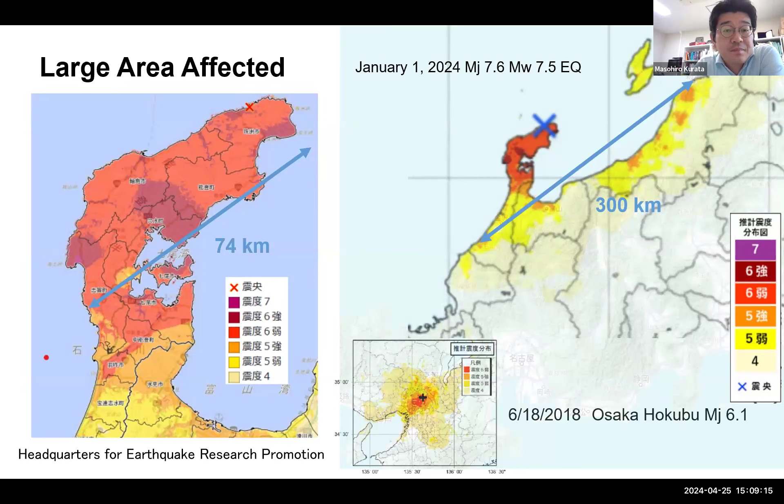So these are the characteristics of the event. As of April 23rd, casualties were 245, housing damage 78,000 units. Non-residential building damage is 23,000. Strong shaking with JMA intensity of 7 was recorded in Wajima, on the top-left side of the Noto Peninsula, and in Shika town.

And the crustal deformation was very significant. Actually, in the Wajima area, the port facility was uplifted by 4 meters, so now there's no water in the port.

This region was known for earthquake swarms. The most recent notable one was in 2007 with magnitude 6.9, and also last year in May they had a magnitude 6.5 earthquake. This time the earthquake warning system worked correctly. In some regions it didn't reach on time, but after about 10 to 20 seconds the earthquake warning was triggered, which helped people prepare for the strong shaking.

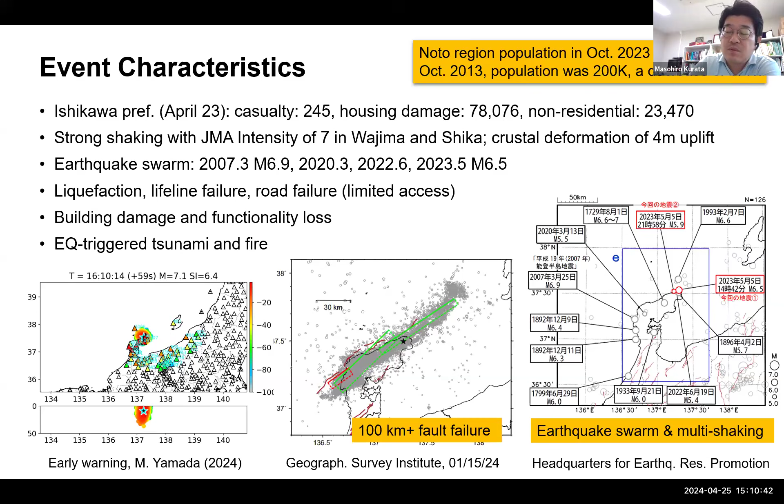A little bit about seismic damage and seismic design in Japan. The new building law was enforced in 1981. From that time, buildings are designed for two levels. Level 1 is for serviceability, for a return period of approximately 50 years. Level 2 is the safety limit for a very rare earthquake with a return period of approximately 500 years.

After the Kobe earthquake, the government and researchers noticed that buildings built after 1981 had a lower collapse ratio and damage ratio, so they enacted laws for the promotion of seismic retrofit. Now hospitals, shops, hotels, schools, and elderly care homes—many of them are seismically upgraded.

And also, even for private buildings, if the building is along a regional disaster response bases or evacuation route, they need to be diagnosed and then recommended for seismic retrofit. More recently, in 2018, after the 2016 Kumamoto earthquake, a new guideline on functional continuity for disaster response space was issued. Now government offices, hospitals, shelters, and schools need to consider functional continuity.

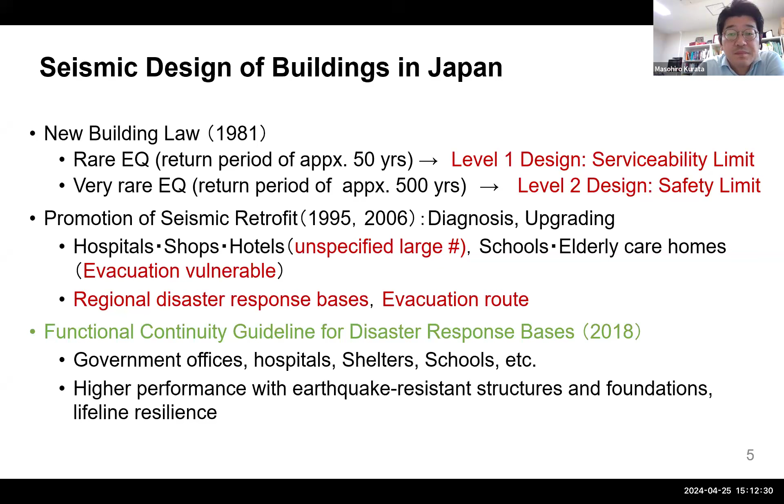This is the recorded ground motion. I believe Professor Goto explained the ground motions last time in the briefing, but in this acceleration spectrum, I compare the recorded motion with the level 2 design strength for buildings.

It's about 1G. So on the north side, or northwest side, of the Noto Peninsula, at most places the ground motion exceeded the design level. And even in the lower part of the peninsula, the ground motion exceeded the level 1 design. So severe building damage was expected.

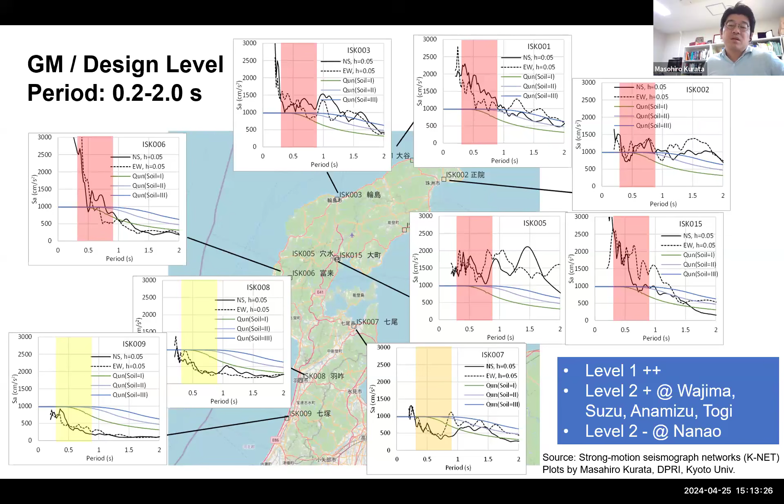A little bit more analysis on the ground motions. These are the figures for the pseudo-acceleration and spectral displacement relationship. For a stiff building with a natural period of 0.2 to 0.3 seconds, the deformation was perhaps not so large.

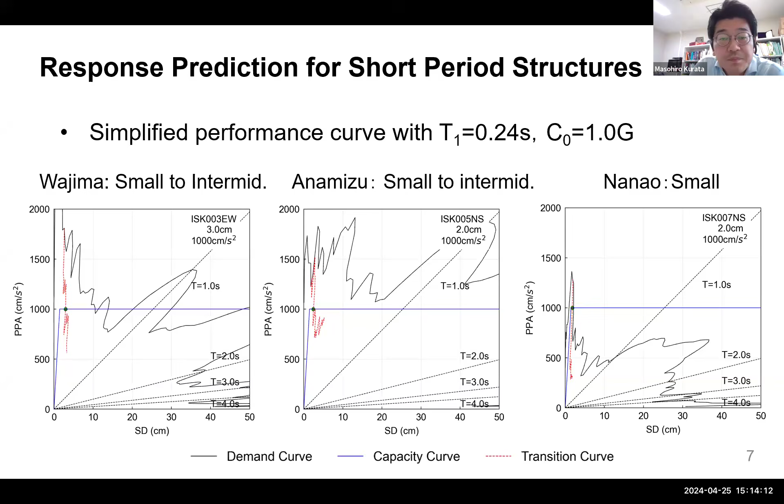While we have a pulse-type motion with power in the period range of 1 to 2 seconds in this spectrum, so if we consider a building with a little bit longer natural period, let's say 0.7 seconds—in Japan steel buildings have a base shear coefficient of 0.3 to 0.45.

So if we set the base shear coefficient to 0.45, the capacity spectra method provides us the large deformations expected for steel buildings or timber buildings with a relatively longer period at some locations.

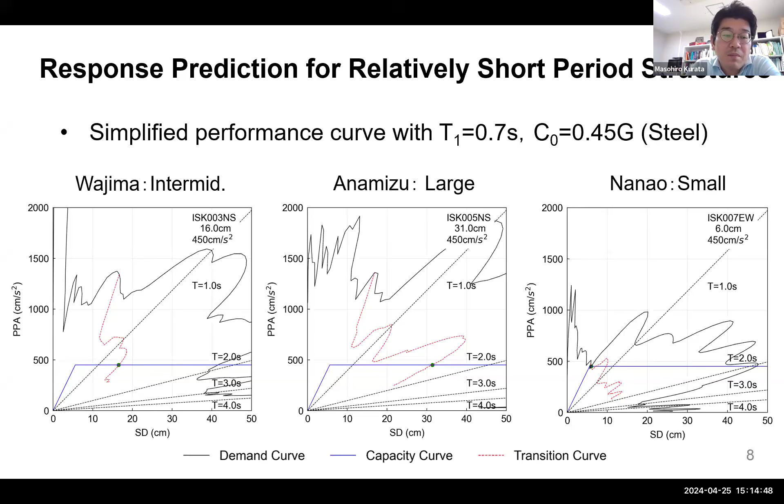We conducted a reconnaissance survey in the area around the ground motion stations. I will focus on the non-residential or non-wood structures, ground deformation around the structures, and the functionality of the disaster response bases or other large buildings.

The survey team's trip departure was approximately 2 weeks after the earthquake with DPRI colleagues, and later with colleagues from Nagoya or Tokyo University we conducted a more detailed survey of the buildings.

At the same time, we hosted Professor Khalid Mosalam of UC Berkeley from November to January. So we had the opportunity to talk about the STEER program for a virtual reconnaissance report, and now we collaborate on their report.

The survey was powered by the Fulcrum STEER application provided by Professor Mosalam's team. So I recorded the photos and then the damage rate using their application.

For example, this is the Wajima City records. WJ01, in the very right, the green one, is the strong ground motion station. From there I walked a little bit for about 2 hours and then recorded the damage of the buildings. The red indicates destruction, mostly residential. There are a few non-residential buildings because this is a kind of suburb in Japan.

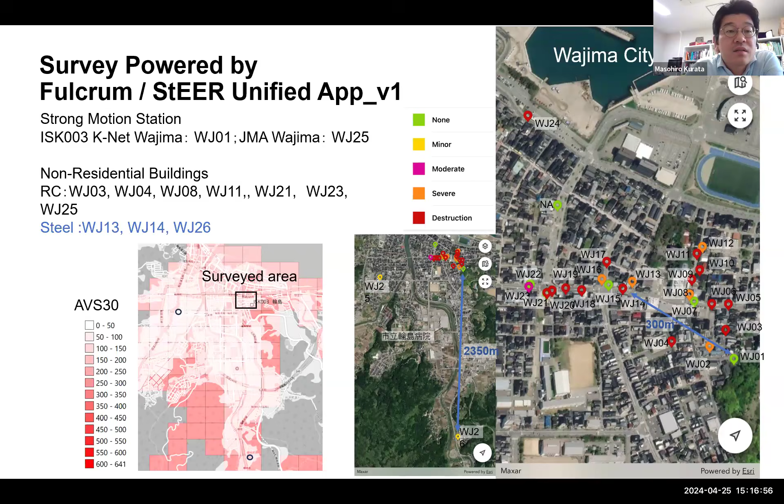I'm originally from the steel structure expertise. However, I only found about 3 steel buildings damaged at this site. This is the scenery of the town, drastically changed by the earthquake.

You see, due to the liquefaction of the reclaimed soils, the lifeline systems uplifted. And then we see a lot of complete collapse of traditional housing in these regions. At that time the temperature was very low, around 1 to 2 degrees, and we had a snow warning.

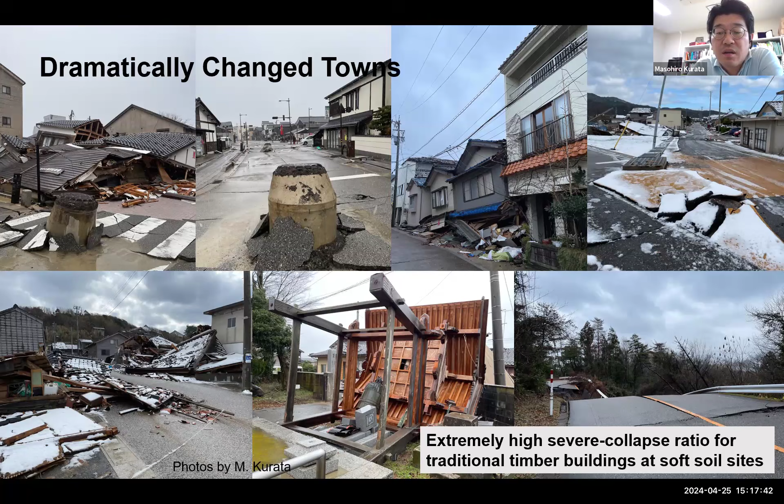Also, a lot of historical structures, including temples and shrines, were severely damaged. This is a photo of a typical traditional timber house in Japan.

It's a moment resisting frame with walls as the shear resistant element. And normally the strength is calculated by the area of the wall.

On top of the roof we have the so-called kawara, which is tile. With strong accelerations they displaced or slipped off.

Those timber houses typically have a semi-rigid joint at the connections. More recent ones have steel anchors, steel holder anchors, and connection elements. But the traditional ones typically have very low stiffness after some deformation.

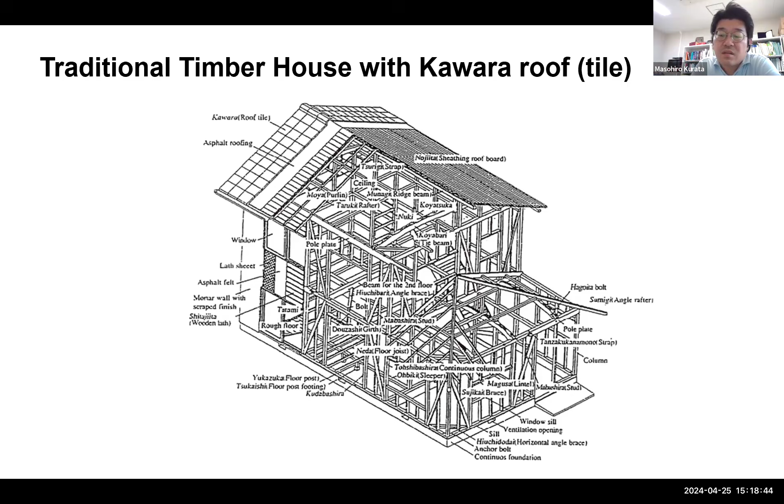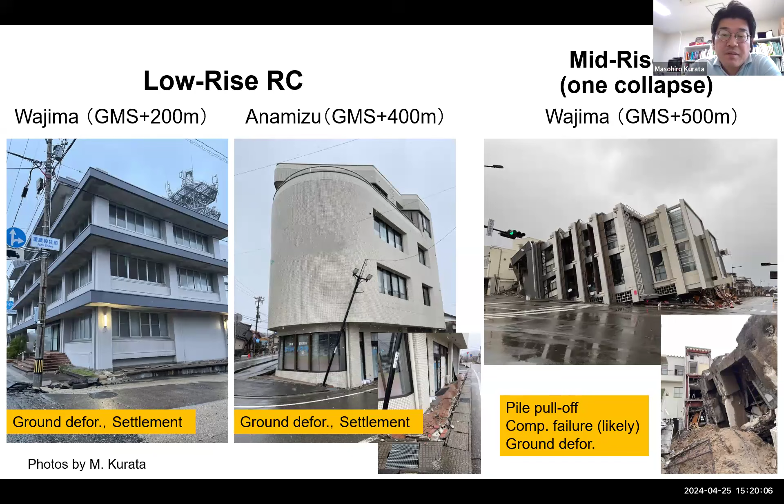But now the investigation is ongoing, like why these piles were pulled off. Before the year 2000 the design for the pile was not seismic, and after 2000 seismic design is enforced. So there are some technical problems for the old buildings in Japan, and it's difficult to retrofit.

For the steel buildings, they are mostly low rises. They are subject to severe ground shaking, and there may be amplification due to the relatively softer, relatively longer period of the structure.

And they suffered from cladding damage, very severe. Some of them collapsed, but they are aged and have very small sections of the column, so they are seismically deficient.

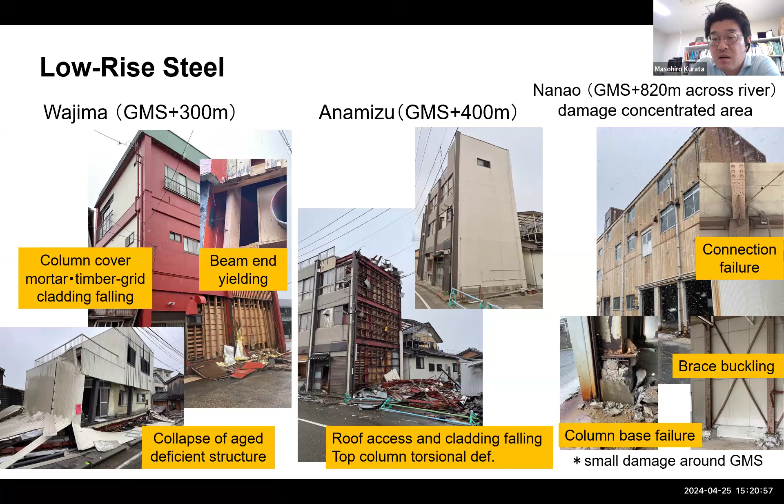We saw also buckling of braces, column base failure, but in the right figure this column base is an old type, so it is not conforming to the new design specifications.

Some statistics: in Wajima and Suzu cities, the severely affected areas have an aging rate of 65 plus for about 50%, which is very high. Even Japan is known as a world-leading aging country with a 28% aging rate, but these regions have a really high aging rate.

Also, vacant houses are an issue, around 20% in this area compared to 13% in all of Japan. The building damage rate issued by the Wajima and Suzu City Council on February 4th says destructive failure was around 35%, which is very, very large, but those are mostly the traditional timber housing.

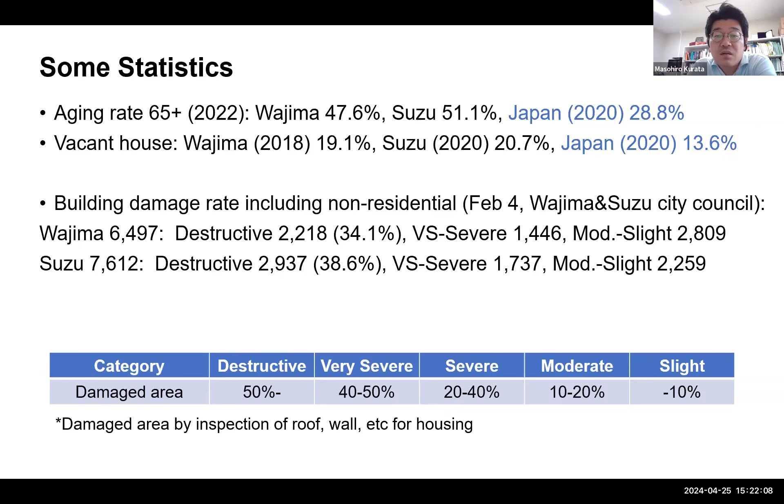If we go to the site, we see a lot of new housing designed and built according to the new specifications. They survive without much damage.

A little bit about the schools. Seismic upgrading was enforced after the Kobe earthquake in 1995. In Ishikawa Prefecture, around 100% earthquake resistant rate was achieved. However, about 85% of public schools in Ishikawa Prefecture were damaged somehow. The damage varies from a single broken glass to structural members or equipment.

Damage to upgraded school buildings is small, but if we see the left figure with steel braces, the building was okay, but with some ignorance in the construction, shear failure of a short column occurred. This is minor, so the building can still be used from a structural aspect.

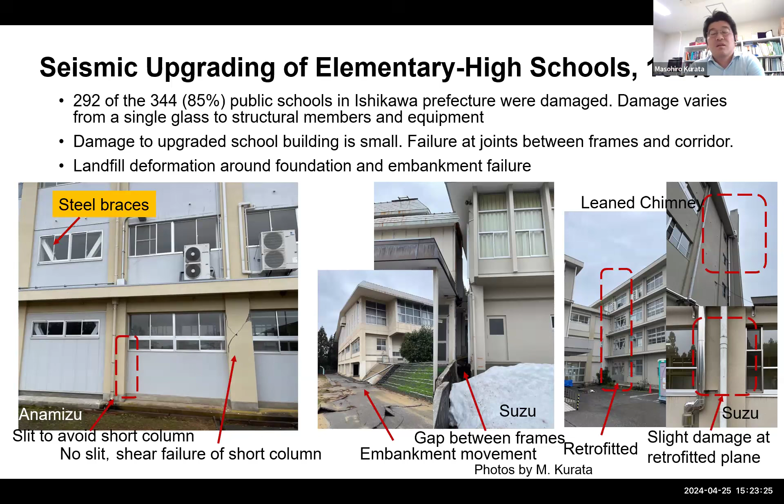The building was mostly fine. However, there's a gap between the frames because of maybe slip or the failure of the embankment, or leaned chimneys, and those non-structural damages were notable.

Talking about non-structurals, these are photos of steel school buildings, but the cladding falling at the higher floors was severe. Likely this is because of the accelerations, not the story drift, as the damage was severe at higher locations. We also see some collision between the ceiling and the claddings, and some contents of the buildings jumped out from the windows over the damaged cladding area.

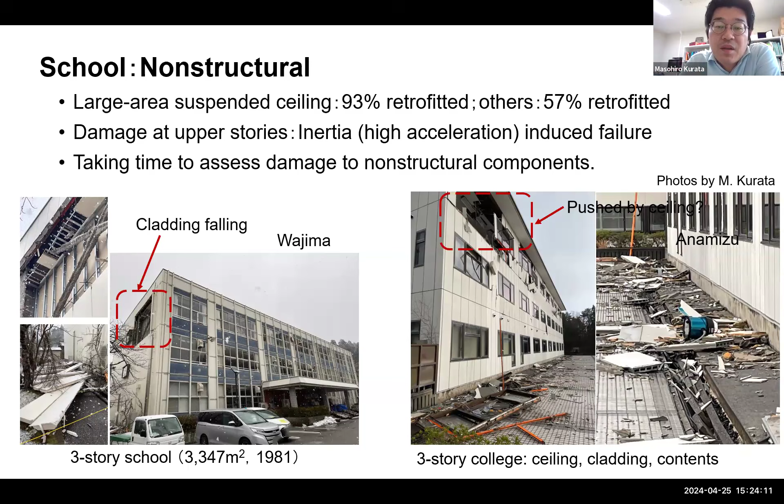Liquefaction was very, very significant. Even when the building was okay, due to this liquefaction, functionality was completely lost.

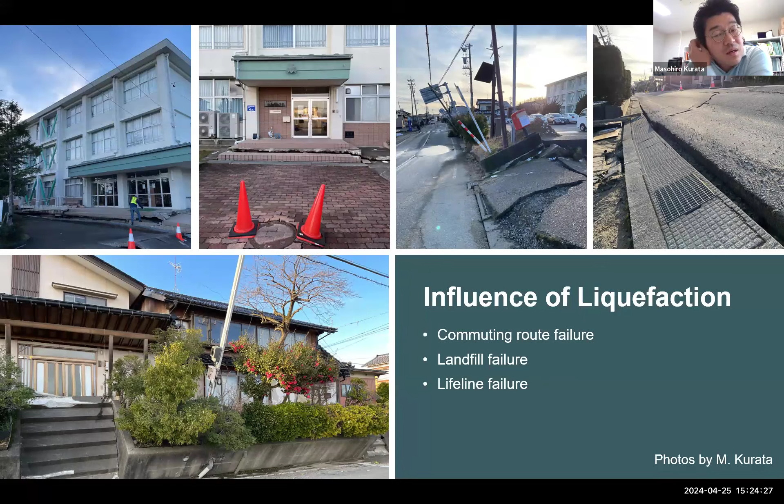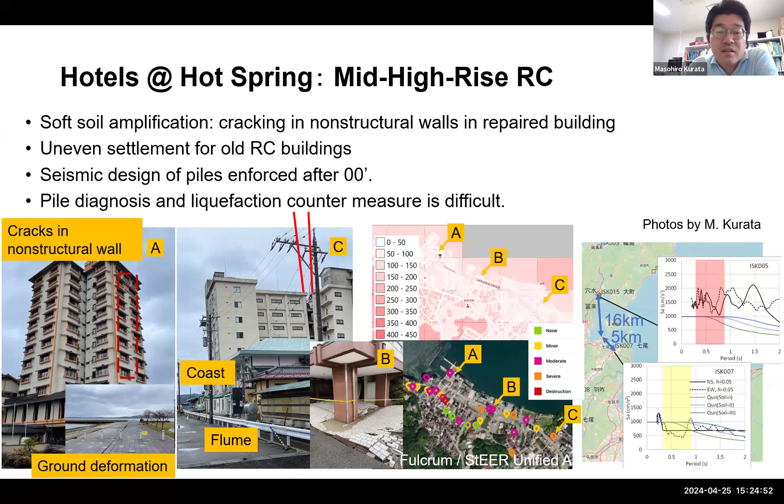Whereas one area of exception, nearby Nanao area, there's a hot spring area. So they are rich, they have a lot of taller buildings with more than 10 stories. Some of them had shear failure in non-structural walls or leaning, again due to soft soil problems.

Steel, there are structural hotels there. They typically suffer damage to the cladding. And if we see closely the steel members after the failure of cladding or a cover of the mortar connections, columns are severely corroded due to this near coast environment.

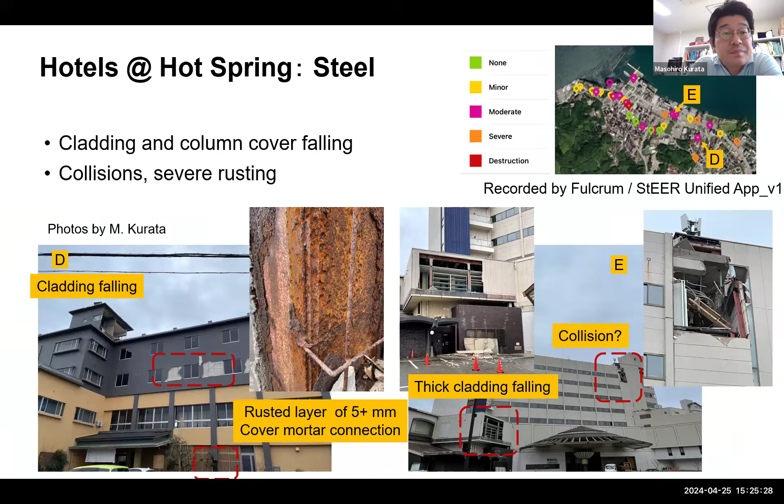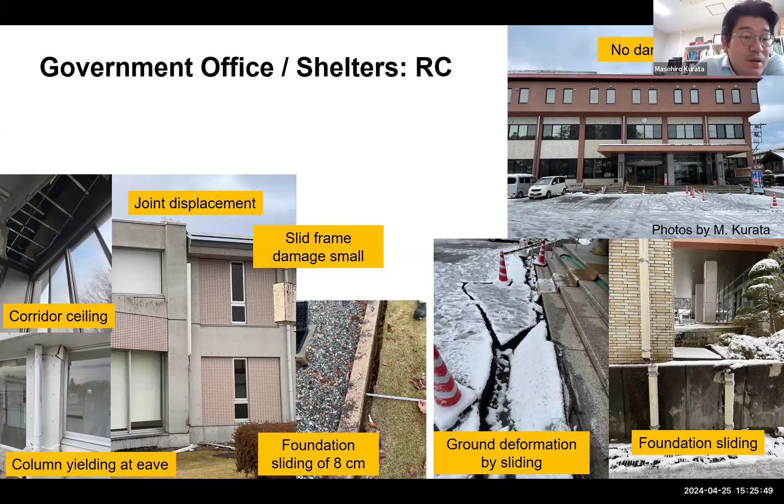Government office shelters were mostly okay, but again, there's ground deformation around the building that was very significant, likely due to strong shaking, of course, and also the softness of the reclaimed land. We also see ceiling failure at some locations.

This is a gymnasium of a government-owned building. Some members fell from, let's say, the light panel material. These light panel materials became popular after the 2011 Tohoku earthquake. They should be safe even if dropped, but however, the wire mesh to hold the panel also dropped together, and they are not so light.

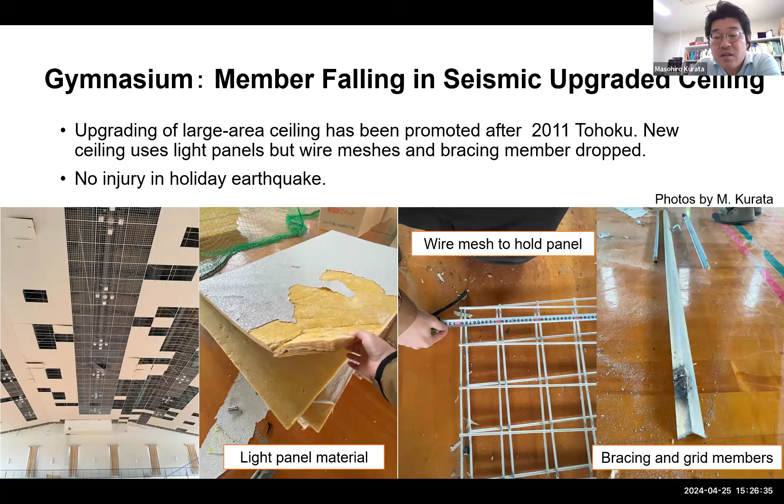And also the bracing and the grid member for the seismic resistance, they also failed at some locations. So those are some problems, maybe recent problems.

About the medical facilities, the major damage in Noto Peninsula, most of the buildings lost functionality due to the failure of water lifelines. Also power outages and partial damage to facilities and equipment. The earthquake resistance ratio for the disaster base hospitals in this area is 100%.

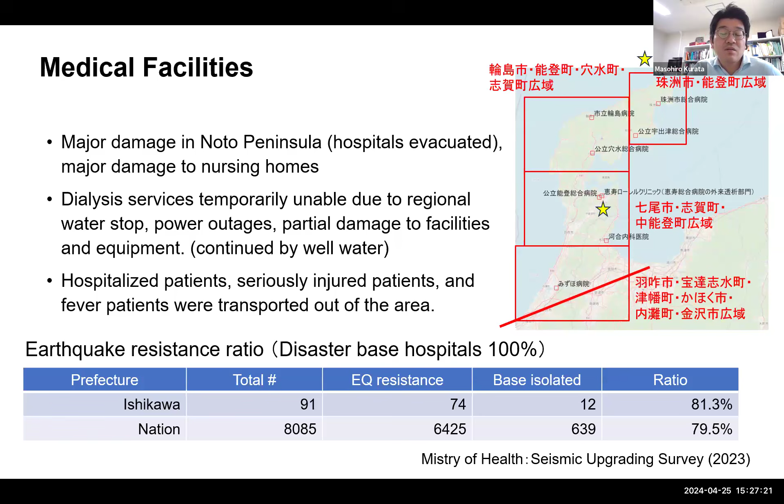However, they couldn't continue their business, and the hospitalized, seriously injured patients were transported out of the area using helicopters. These are some photos of the building damage at the hospitals: severe ground settlement, slope failure, and some non-structural components failure inside.

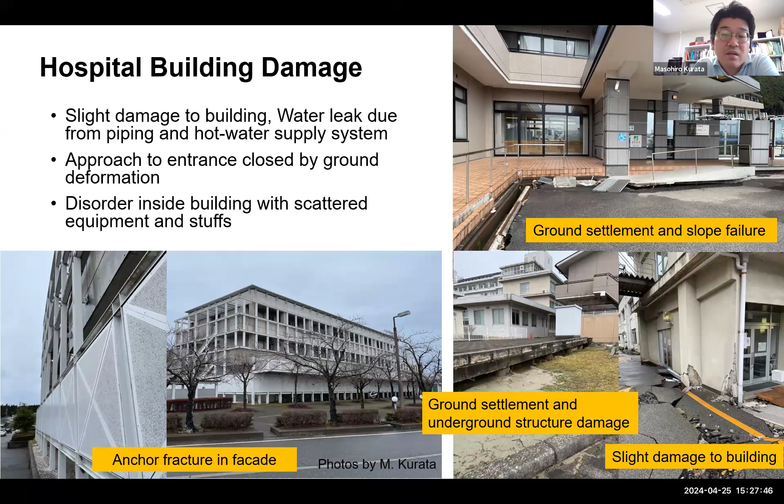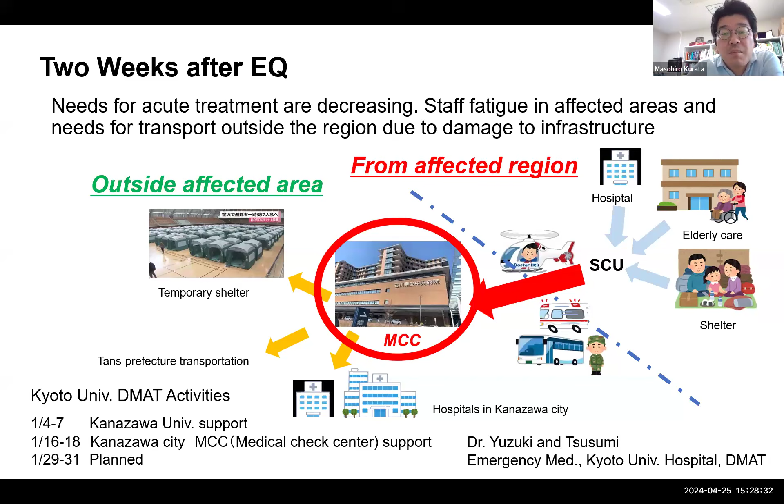In Japan, hospitals have BCPs (Business Continuity Plans). The BCPs were enforced in 2019, and for the disaster-based, large-scale hospitals, they are expected to have higher functionality after an earthquake or any disaster.

However, currently, according to the newspapers, the occupancy rate dropped to 20% due to staff shortage in some Wajima and Suzu City hospitals. The summaries showed reinforced concrete buildings with uneven settlement in areas with soft ground was notable. For steel buildings, non-structural failure with exterior walls, and then severe corrosion was a problem.

And for seismically isolated buildings, I didn't explain much, but there are several, and they worked properly. And for education and other facilities, earthquake-resistant buildings are effective.

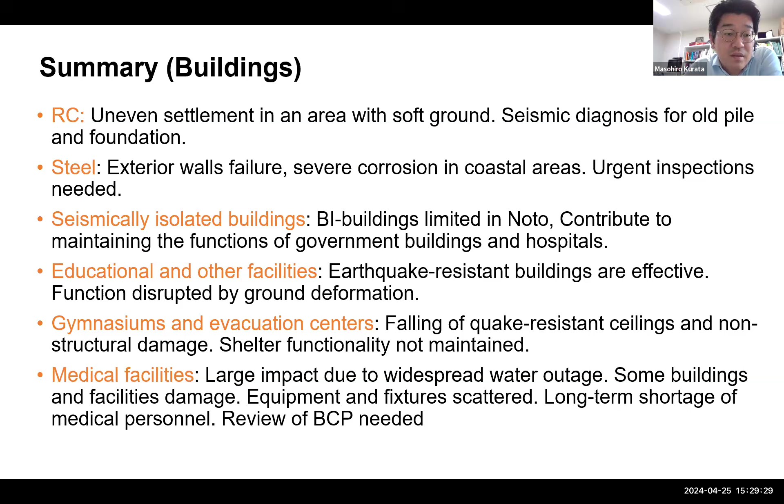Ongoing discussions for policymakers now start to discuss review of the regional factor, which was set before World War II. It was 0.9 for Ishikawa, 0.9 for Kumamoto for the strength reductions, but apparently they did not match with recent earthquake activities. Impact of foundation pile failure due to soft soils, or continuity of building usage, are some of the issues under discussion.

Also, the probabilistic hazard map in Japan, in the bottom left side, is severely governed by the Nankai Trough, the big mega earthquakes. However, in Ishikawa, the Kanazawa area in the bottom side has larger probability than the Noto Peninsula. However, in the Japan Sea coastline, there are offshore faults which triggered this earthquake. We have that information, but it is not affected, included, or reflected inside the probabilistic hazard map.

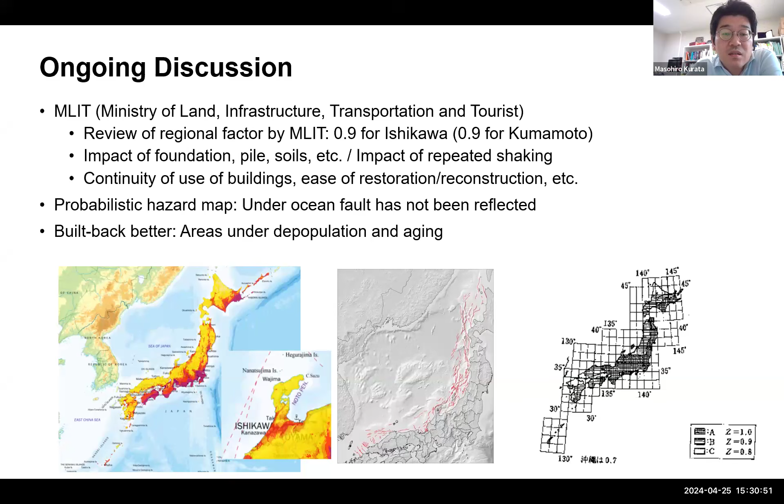They may need to be updated. And then other serious discussions on whether we do build back better, because these areas are under depopulation and aging. Thank you very much for your kind attention. This is my talk. Thank you.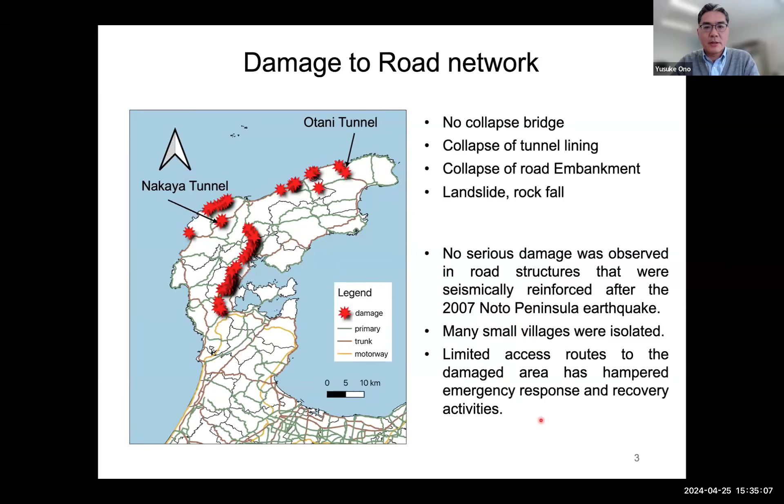So as I mentioned, there are many blocked roads. Many small villages were isolated, and this is a point that limited access routes to the damaged area hampered emergency response and recovery activities so much. This is the access route immediately after the main shock - the red line shows the road we could pass through. As I mentioned, many roads were blocked, and access routes to the northern Noto Peninsula were very limited. In particular, there was only one route from Nanao City to Anamizu town, which caused heavy traffic congestion.

Actually, when I visited Wajima City here, 10 days after the earthquake, I drove more than 7 hours from Kanazawa City. Kanazawa City is the nearest bigger city to Wajima City.

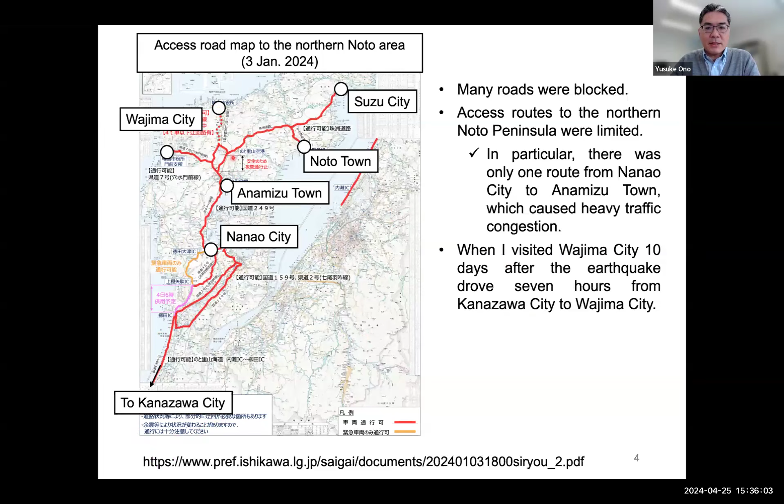These photos show the damage to road structures. This is a case of a collapse of a road embankment, and this shows the landslide which broke the transportation. And these photos show the damaged tunnels - the left side one is Otani tunnel, and the right side one is Nakaya tunnel. You can see the linings dropped off.

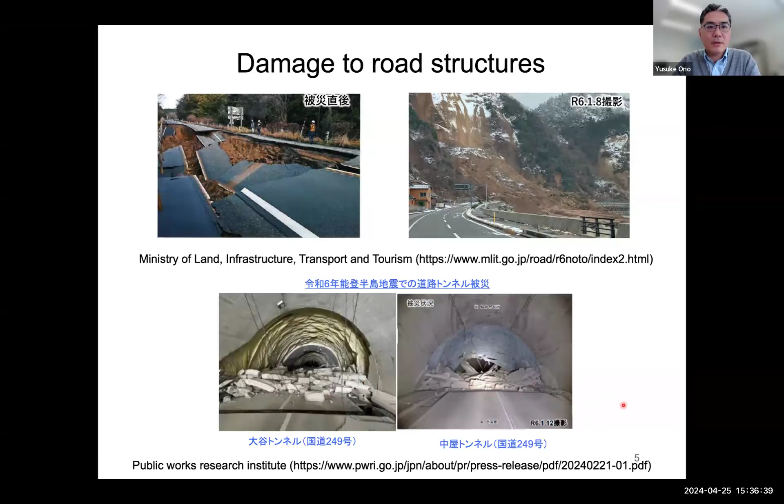Next, let's move on to the damage to water supply systems. Damage occurred in Ishikawa, Toyama, Gifu, and Niigata prefectures. Water disruptions were restored within a few days in all prefectures except Ishikawa. In the northern Noto Peninsula area, a large number of residents still do not have access to tap water, so restoration activities are still ongoing, and the full extent of the damage is not yet clear.

We can say that damage to earthquake-resistant pipes was limited to those involved in massive landslides and other large-scale ground movements.

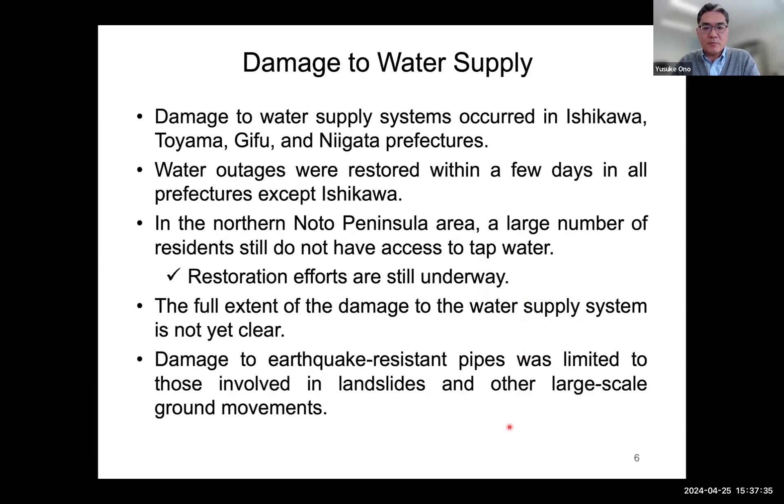This map shows the municipalities where water supply was disrupted. You can see the epicenter of the main shock is around here, so very wide areas were affected by this earthquake. In this figure, I put the names of municipalities which were heavily affected, and the figures below the names of the cities and towns show the number of households without water supply.

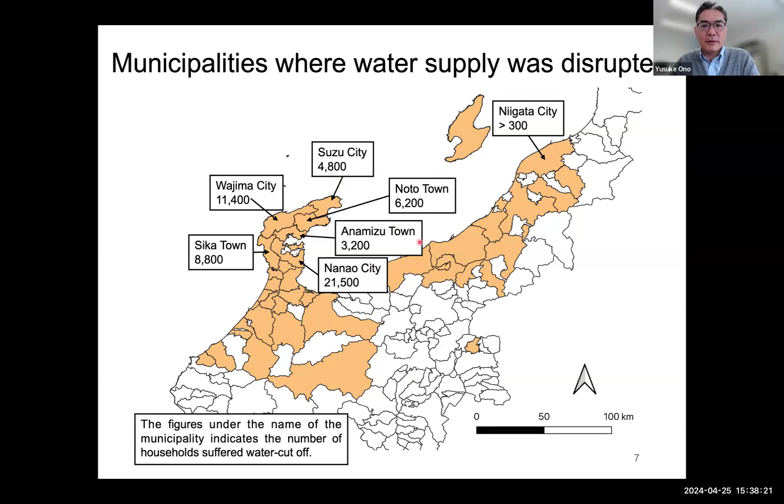This slide shows the restoration of water supply. The vertical axis indicates the days spent for restoration since the main shock. For Toyama Prefecture, it took 20 days, and for Niigata Prefecture, it took 6 or 7 days. Restoration works have not yet been completed in Ishikawa Prefecture, so I didn't include that data in this diagram. For Toyama, although it took almost 20 days overall, 90% of water outages were resolved within 9 days.

This map shows the location of these prefectures. Ishikawa is here, Toyama is here, this is Gifu, Nagano, and Niigata.

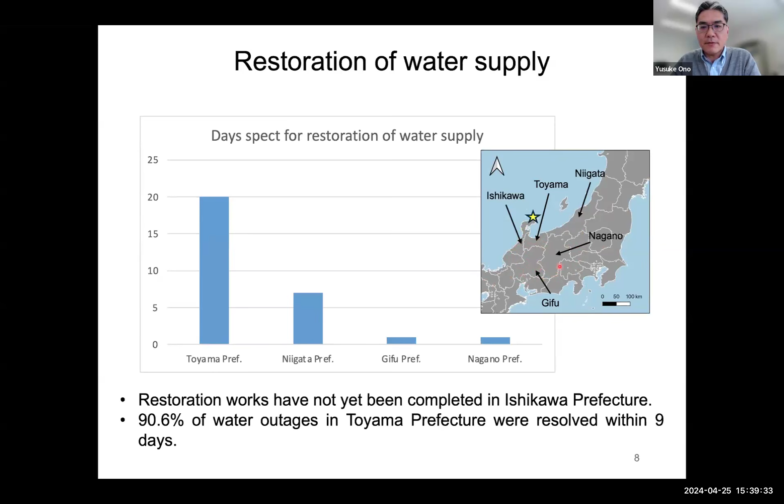This graph shows the restoration rate of water supply in the Noto area, particularly northern Noto. Here's Wajima City, Anamizu Town, Noto Town, and Suzu City. From Kanazawa City to Suzu City, the distance is about 100 kilometers, and the horizontal axis indicates the days since the main shock.

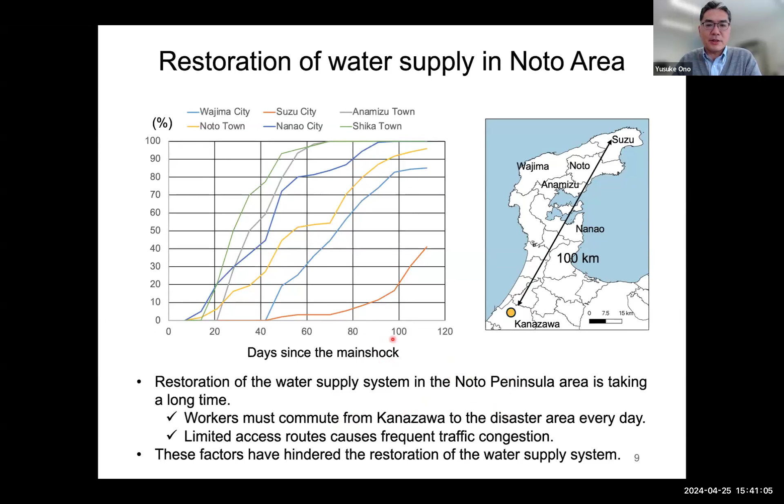Look at this diagram: the green one is Shika Town, and this is Anamizu Town, Nanao City, Noto Town, Wajima City, and Suzu City. The restoration of the water supply system in the Noto Peninsula area is taking a long time. This happened because workers must commute from Kanazawa to the disaster area every day, and limited access routes cause frequent traffic congestion for them. These factors have hindered the restoration of the water supply system, and they are the reason it takes so long to finish.

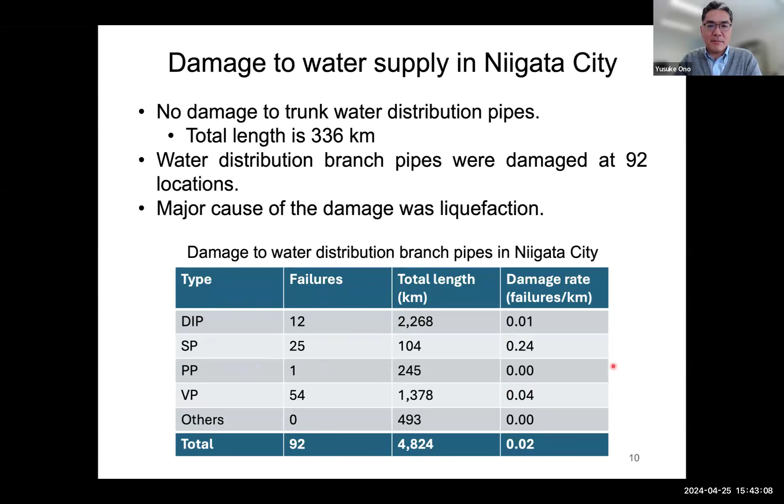I'm not sure of the reason. I'm still asking the local government, but I guess these are old pipes, and maybe they suffered massive ground displacement.

These photos show the typical case of damage to water distribution pipes in Niigata City. Most of them were pulled out at the joint. It may be hard to see, but there's a pull-out here.

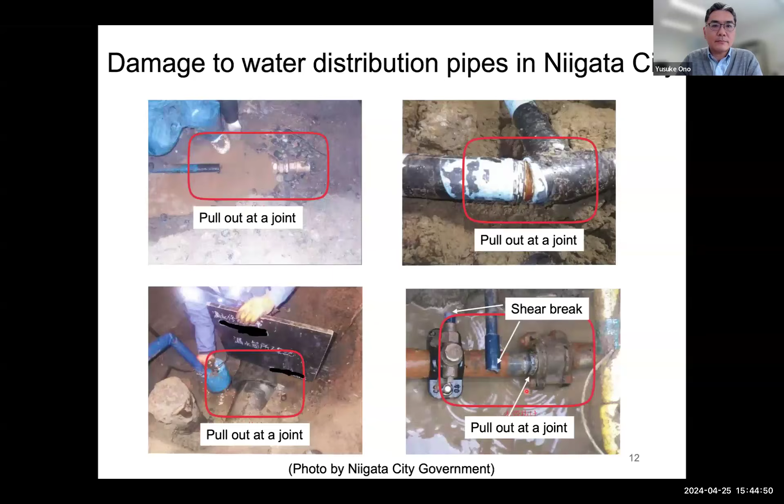Next, I move on to damage to the wastewater treatment system. The wastewater treatment system in Ishikawa Prefecture was severely damaged. Sewage pipes were damaged due to ground displacement, and manholes floated in liquefied areas. Nine sewage treatment plants are reported to have lost their functions.

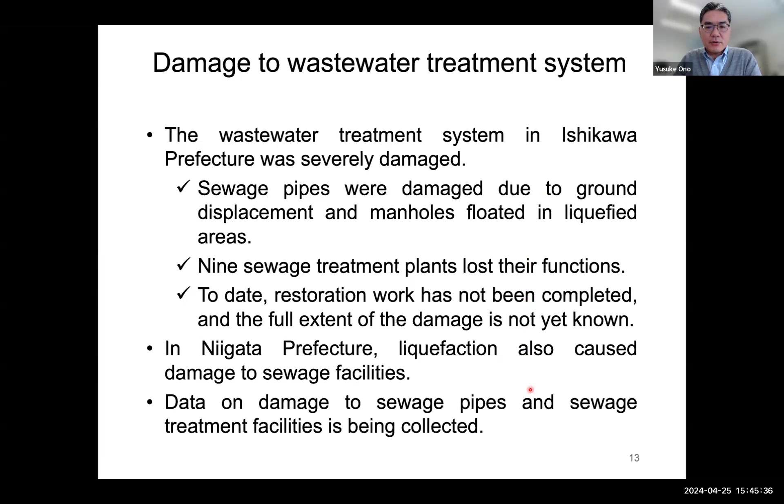To date, restoration work has not been completed, as well as for the drinking water supply system, and the full extent of the damage is not yet clear. In Niigata Prefecture, liquefaction also caused damage to sewage facilities. Data on damage to sewage pipes and sewage treatment facilities is being collected.

These are photos provided by the Niigata City Government Office. You can see water coming into the sewage pipes through cracks that occurred in them. And this is the case of a floated manhole. I think Masahiro showed the same one.

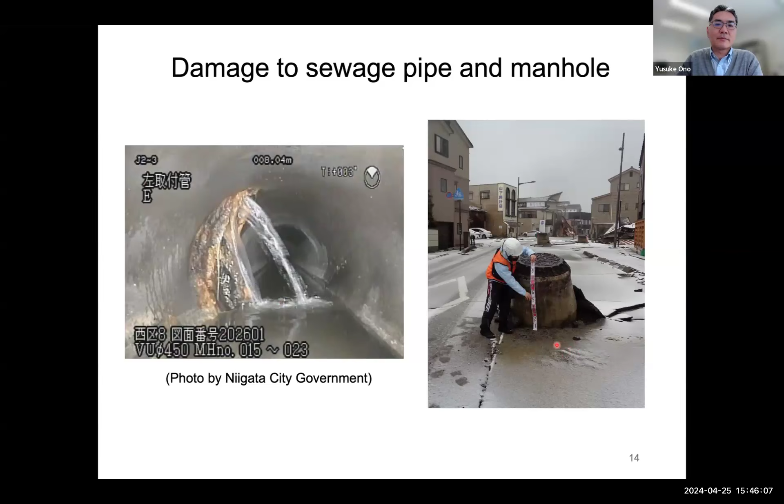The next topic is damage to electrical power facilities. The electrical power outage took place immediately after the earthquake. At the most, 1,600 customers in Niigata Prefecture and 35,000 customers in Ishikawa Prefecture lost access to electrical power.

The outage was caused by failures in the power distribution network. There were damaged power plants, but they didn't affect this electrical power outage. So the damage to power plants is shown here.

The Shika nuclear power station was slightly damaged, but not seriously. It had already been shut down before the earthquake. Another one is the Nanao Ohta Thermal Power Station. This was shut down due to the earthquake and was damaged, though I'm not sure of the details.

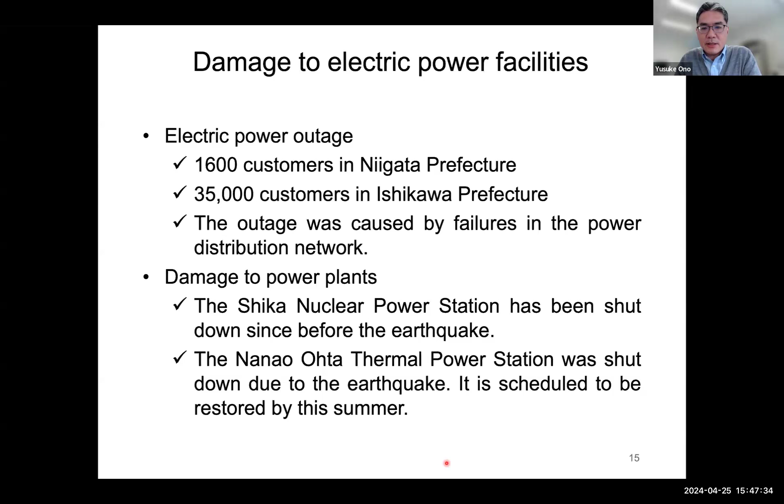Now the restoration work is ongoing. The authority announced that it is scheduled to be restored by this summer.

This is the damage to electrical power supply in the Noto area. The left-hand side shows the number of customers without electric power after the earthquake. Most cases of power outages occurred in the Noto areas. In Wajima City, more than 10,000 customers lost power.

The right-hand figure shows the restoration rate of electrical power supply. The horizontal axis shows days since the main shock, and the vertical axis shows the percentage of restoration. It took 20 days for Anamizu and Noto Town to recover from the blackout, and 60 days for Wajima and Suzu cities.

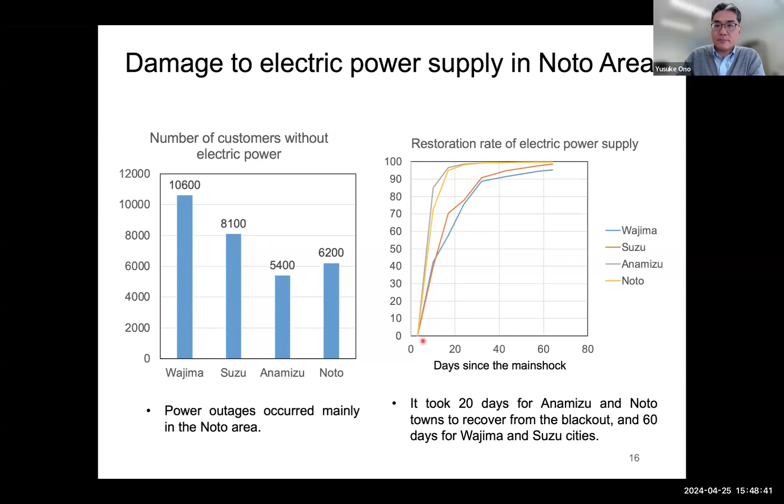This is the final slide of my presentation, where I'd like to summarize lessons learned from the 2024 Noto Peninsula earthquake from a lifeline aspect. When earthquake damage occurs in a peninsula region such as Noto Peninsula, emergency response and recovery activities are likely to be prolonged due to access difficulties. The road network needs to be strengthened, taking into account geographical characteristics.

The second lesson is that earthquake-resistant water supply pipelines withstood the shaking of the earthquake well, showing good performance. However, they were damaged when involved in large-scale ground flow, such as landslides, slope failures, and lateral spreading due to liquefaction. If the sewage system does not function, use of the water supply system will be restricted.

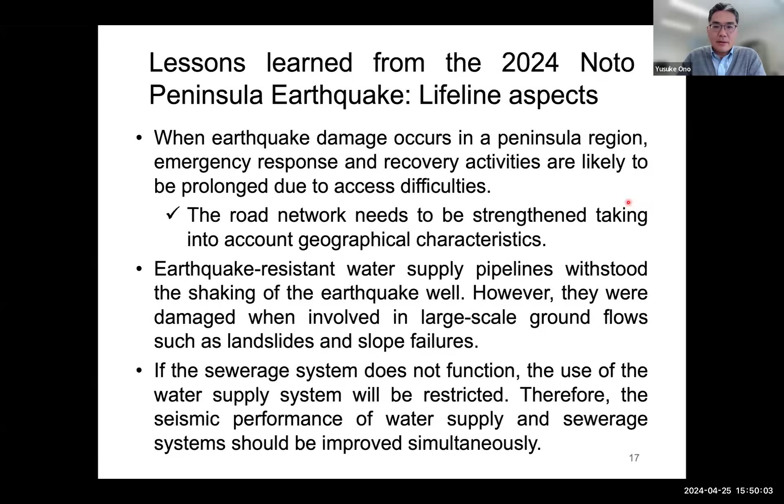Therefore, the seismic performance of water supply and sewerage systems should be improved simultaneously. These are just my opinions; of course, I need more analysis and data collection, and more discussion with you. Thank you very much for your kind attention.